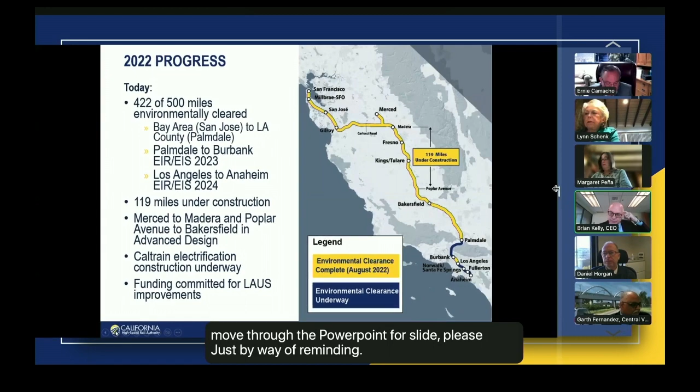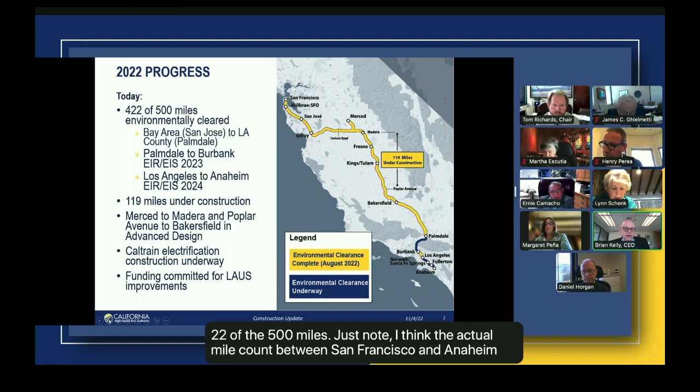Just by way of reminder, some things that we've progressed during 2022. One, the board well knows all of the environmental documents that we have brought to the board and been cleared. In the last 2.5 years, we've added about 330 miles of cleared environmental documents extending into the Bay Area and into Southern California. We expect in 2023 we'll be coming back to the board with the certification question for Palmdale to Burbank toward the end of 2023. That draft is now out for public comment. So as of today, we've cleared 422 of the 500 miles. Just note, I think the actual mile count between San Francisco and Anaheim based on our route is 494 miles, but we round to 500 for purposes of simplicity.

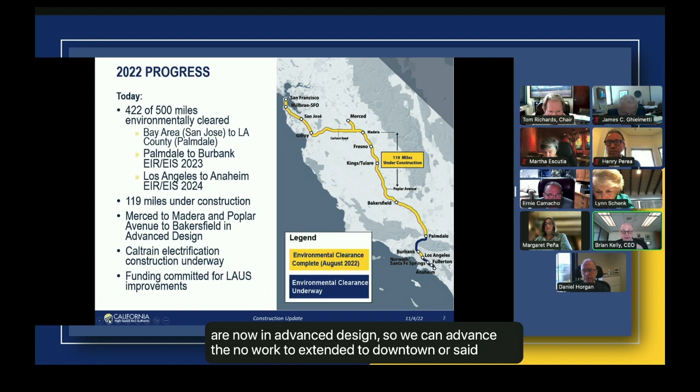We have 119 miles under construction in the Central Valley. Merced to Madera and Poplar Avenue to Bakersfield are now in advanced design, so we can advance the work to extend into downtown Merced and downtown Bakersfield, consistent with legislative direction in the Budget Act. Caltrain electrification construction is underway in the Bay Area, and by way of reminder, we are big time contributors to that project. That project has a cost estimate of about $2.3 billion.

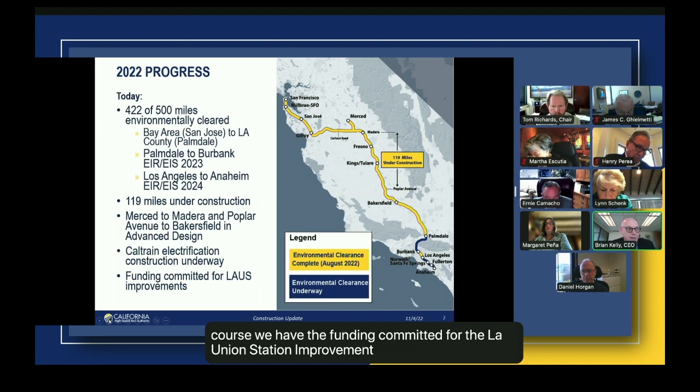$3.3 billion, and the High Speed Rail Authority is contributing about $733 million to that effort. That construction is underway. And of course, we have the funding committed for the LA Union Station improvements in Los Angeles to the tune of about $423 million.

Just talking about the Central Valley in general, this is where we're now working for the initial operating segment, with the goal to achieve initial operations by 2030. It's a 171-mile stretch, 100% environmentally cleared. Right now, 119 of those 171 are under construction. 52 miles are started in advanced design work, 34 miles roughly into downtown Merced, and about 18 miles south into downtown Bakersfield. We also have the design for the Central Valley stations underway right now.

As the board members know, the track and systems procurement we paused on during 2022, and we'll look to come back for that procurement during 2023, along with perhaps the train procurement as early as the end of 2023. We'll obviously be coming back to the board about those. And in my CEO report, I'll talk a little bit more about upcoming procurements.

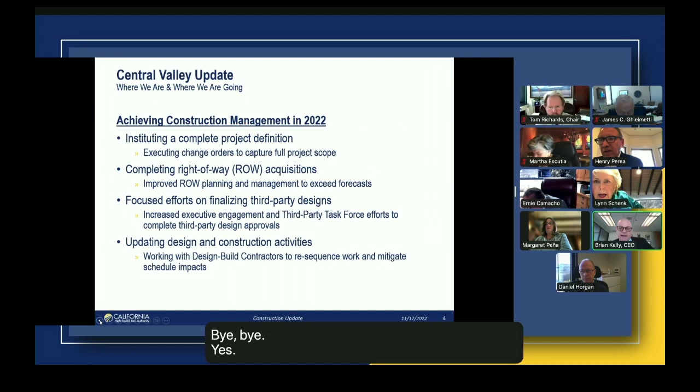Next slide. Brian, I have a question for you. Go back to that slide. Going back to the track and systems procurement in 2023 — I'm just trying to wrap my mind around, if we spent 3 years on a process that fell apart in the last month or so, what makes us think that we're going to have a procurement in 2023?

Well, I think, first of all, I think it was very educational, that procurement process. And I also think things like COVID, things like disruption in the markets tied to COVID, supply chain issues, and record inflation all led to difficult procurement strategies during 2022. I think the inflation number is starting to come down, and I think it'll come down further. I think the supply chain issues will abate as we get further into this. And I think we have to look at how we restructure that procurement. We did track and systems along with the track, the systems, and the signaling all together. And we may want to consider, based on what we learned during that process, a restructuring of how we will move forward on that. So we may regroup those issues differently as we go forward.

For example, I believe we'll get more competition and more contractors interested in just the track work, and there will be fewer that are capable of doing the signaling and systems and perhaps the rolling stock. So we'll look at how we group those things separately to get the most competition out of the process. But I think once we move forward on our strategy, we'll come back to the board with how we would lay that out, and there'll be a discussion of when to go forward. I think we do need to go forward with it, though, before the new year gets out, so we can stay on track for a 2030 operating date.

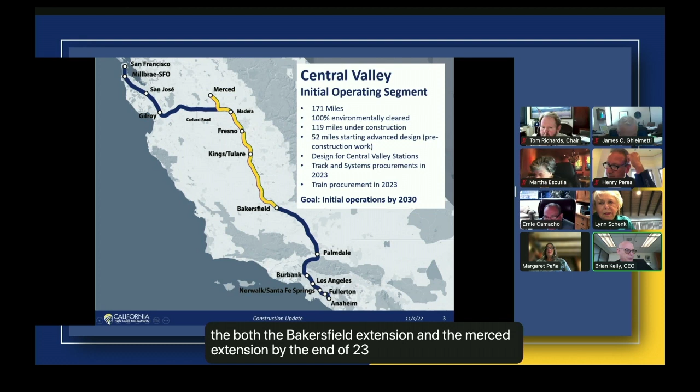We are now in design expansion for Merced and Bakersfield. It is an aggressive target, but I believe we'll be at 30% design for both the Bakersfield extension and the Merced extension by the end of '23, which means we can start a full and active right-of-way procurement process and move forward. So I think 7 years for something that's environmentally cleared now, with design advanced by the end of the year, is very doable. I like ambitious goals.

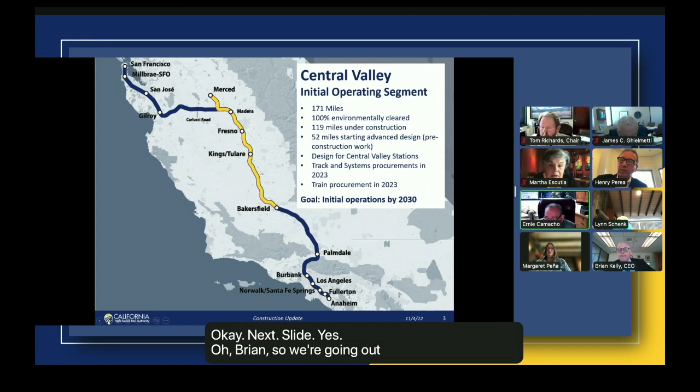Okay, next slide. We're going out talking to industry about the track and systems procurement to find out which approach will yield us the most amount of competition. I think we learned a lot in this process, Ernie.

Between a global pandemic, 40-year inflation high, and supply chain issues, the market was tough. We had requests to extend it even further, and I made a decision not to. I think it was better to pause it right now, let the market calm down. We got really good feedback from industry during that process on how we might restructure this going forward, and I think there are ways to do that to maximize competition. We want to explore that, put the strategy together, and bring it to you guys for approval.

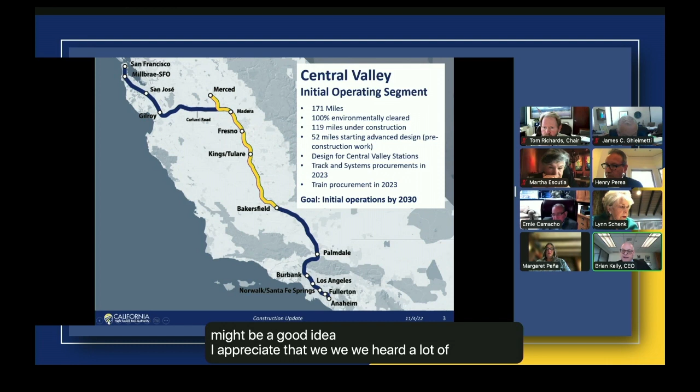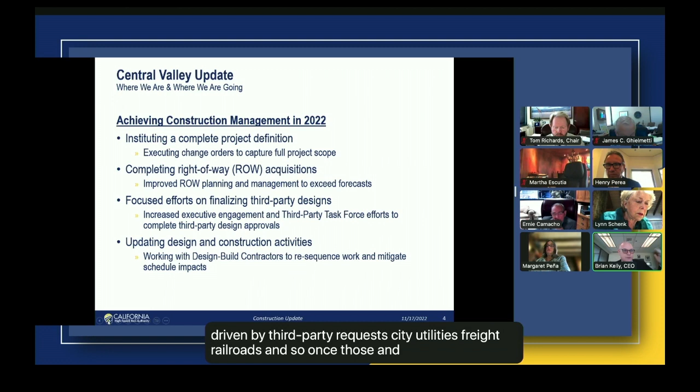We saw scope changes to the structures that are to be built, mostly driven by third-party requests—cities, utilities, freight railroads. A lot of those scope changes were agreed to in the years between 2015 and 2018, and we've been endeavoring to define all of that scope, get it into the contracts, and move the contracts forward, then get into more traditional contract management. But you've got to get scope done before you can develop pure schedule and cost. That's what we've been driving to do, and we're coming to the end of that, so I feel good about where we are.

The other thing that was important for us to do is put out very realistic and achievable right-of-way acquisition numbers, because you can't predict when you're going to get work done if you don't have the right-of-way in hand. So the first thing to do was to get very realistic and lay out a right-of-way schedule that was achievable. In a minute, I'm going to show you how we're doing on that front.

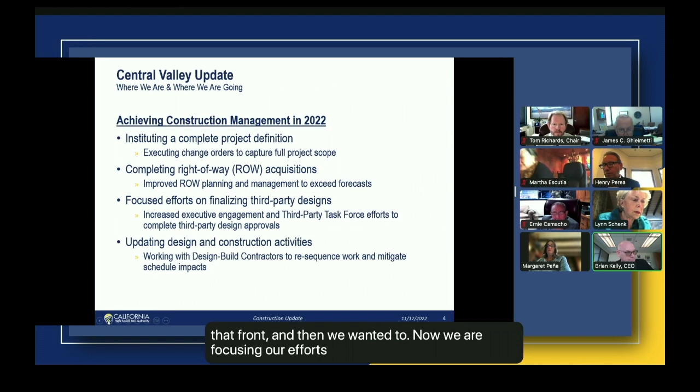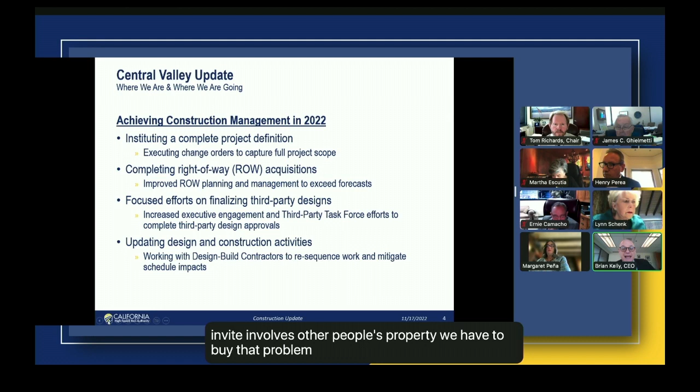And then now we are focusing our efforts on finalizing third-party design issues. What this means, so the members understand, is there are several places where we are relocating utilities—maybe an electric line, a telephone line, or a gas line. We have to move these things, and sometimes that involves other people's property. We have to buy that property and design what those relocation locations look like. So we now have a very focused process here on what we call the third-party process.

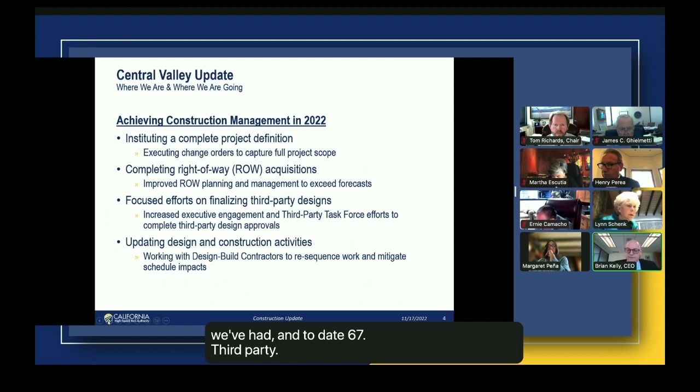We identified 67 third-party issues we've had, and to date we have solved 58 of those. So we have 9 left, and we continue to work through those to get that stuff done so we can move very efficiently going forward. And finally, working with our design-build contractors to resequence the work and make sure we're mitigating schedule impacts as best we can. These are the 4 key things we are working on as we go forward on this process. Next slide.

Let's talk about right-of-way status. I always like to report to the board on where we are. I know longtime members like Tom and Lynn know this has been a tough slog for the authority, but we really are in much better shape today.

We laid out a very realistic right-of-way schedule at the beginning of 2022. The downside of laying out the new schedule was it did set back our original estimates for construction completion, but those estimates needed a better right-of-way program in place, and now we have that.

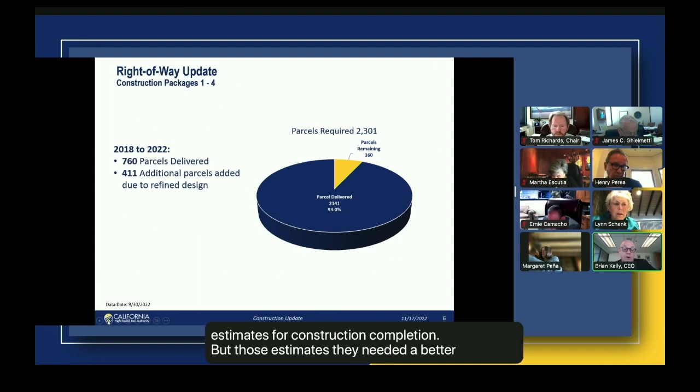This chart reflects where we are. We have about 2,301 parcels to get. We're 93% through that. We've delivered 2,141 of those parcels, and actually through October, we're up a little bit more, at about 93.6%.

When I came here at the authority in 2018, the estimate of parcels we needed was below 2,000, but that was because a lot of the scope was not in yet. Now that scope is all in. We added additional parcels, and so we stand where we stand today.

We need roughly 2,301 to get all the 119 work done. We've delivered 2,141, and actually through October, we're up to 2,157. So we're about 93.5% done with the right of way.

Next slide. Well, wait, Brian, slow down a little bit. During the pre-meeting briefing with Brian Annis, I had asked about some of the challenges in the remaining parcels. Happy to hear the answer, but I think now that we're in public session, I'll ask it again. And that is, are there any parcels that you foresee having some challenges in the community, the schools, churches, community centers, anything that would impact the community in a negative way?

Yeah, I mean, most of those kind of fights are behind us. I'm not identifying a single one that I see as a big political fight or battle in front of us. What we have in front of us mostly are issues that we have to move to complete relocation of utilities and things like that. There are some landowners who want to take us all the way through the condemnation process, and so we're recognizing that.

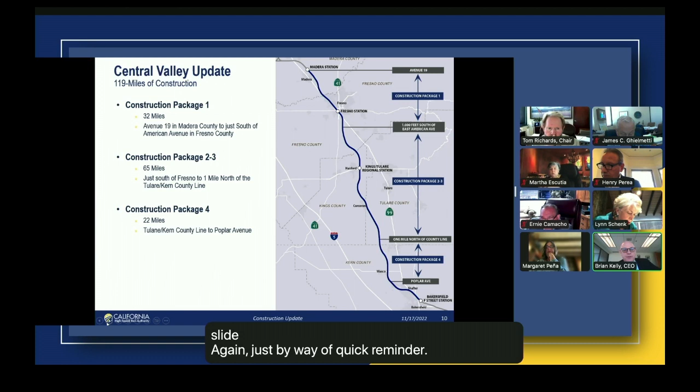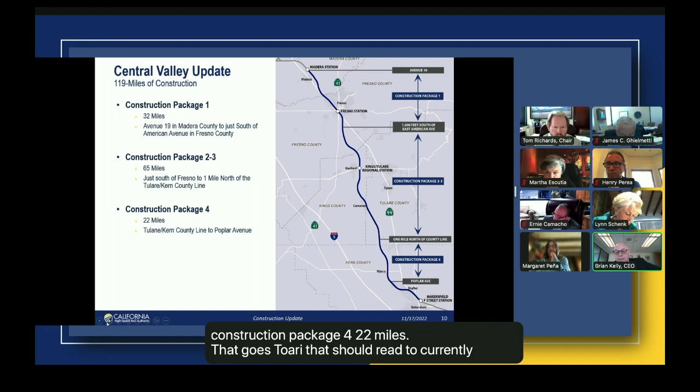Just by way of quick reminder: Construction Package 1 is 32 miles in the northern part of Fresno County and southern part of Madera County, from Avenue 19 in Madera to just south of American Avenue in Fresno County. CP 2-3 is the 65 miles in the middle, south of Fresno, to just 1 mile north of the Tulare-Kern County line. Construction Package 4 is 22 miles from the Tulare-Kern County line to Poplar Avenue in Kern County, about 18 miles north of Bakersfield.

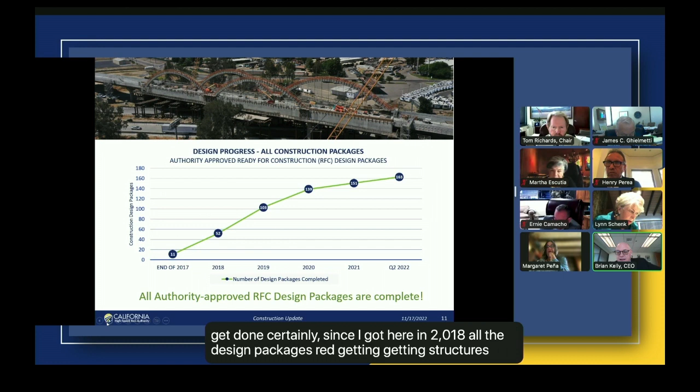This is a slide you're familiar with. One of the things we had to get done, certainly since I got here in 2018, was getting all the design packages ready, getting structures ready for construction, getting those designs completed. When I arrived, we had about 50 done of the 163 we needed. Today, all 163 are complete.

These are design packages for the structures we are building that are part of our system. We are still working through design issues on some of the utility relocations, but this chart shows the completion of the design for the structures needed as part of our system, and we've now completed that design work.

Utility relocation and design package approval: we have roughly 1,860 utility relocation designs needed. As of now, we have about 1,492 of those complete, and we have a schedule to get it to about 98% complete by June of 2023.

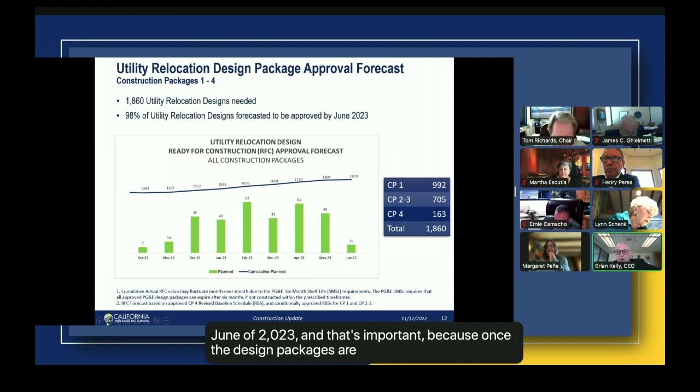That's important because once these design packages are clear, you work with the third parties, the utilities, the railroads, and others to execute crossing agreements and work plans and get everything else done so you can get to construction. So getting these design packages complete is important, and it's a key focus of what we're working on now. This is getting to the end of that pre-construction work so we can get into full construction in the valley.

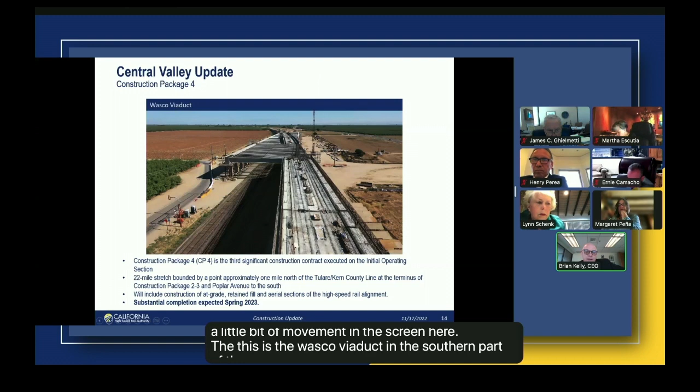I'm going to start with Construction Package 4, our southernmost construction package. This is the Wasco Viaduct in the southern part of the CP4 package. Again, it's a 22-mile stretch bound by a point approximately 1 mile north of the Tulare-Kern County line. The terminus is at Poplar Avenue to the south, about 18 miles north of downtown Bakersfield. It includes a lot of at-grade, retained fill, and aerial sections of the high-speed rail alignment.

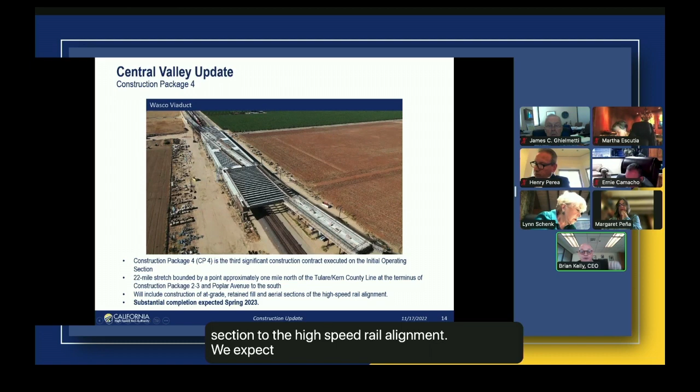We expect substantial completion of this in spring of 2023. CP4 is really coming to the end of the civil works, and this 22-mile stretch will be the first available stretch for doing the prep work and things necessary for the track element. This will be the first construction package to get to significant, substantial completion in spring of '23.

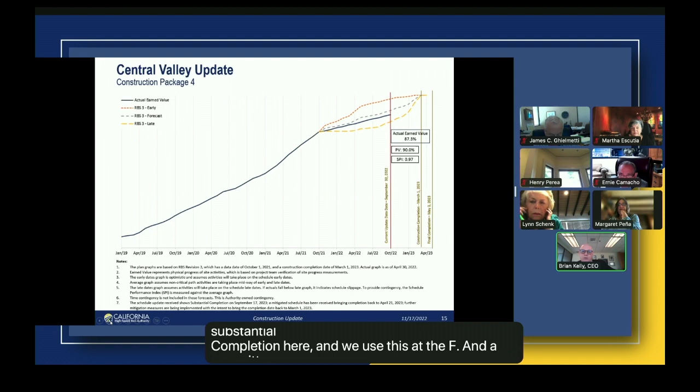We use this metric to show where we are on this. That SPI number, you want to see it at 1, meaning we're right on track to meet our estimated March 1st, 2023 date. We're slightly below that, but above the bottom line, so we're tracking for a spring 2023 substantial completion date here. We use this at the F&A committee to show where we are on this project in terms of delivery.

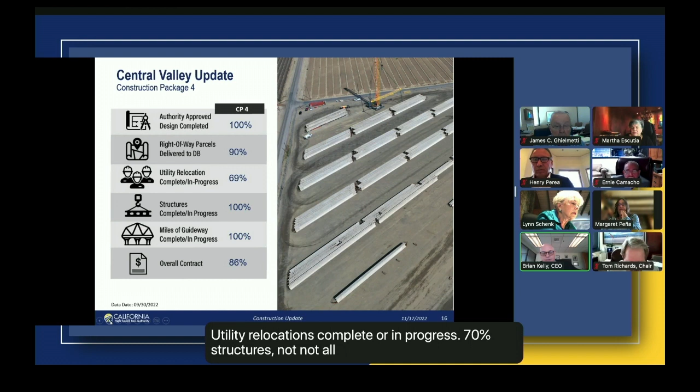The scorecard shows where we are in the various elements of pre-construction and construction work. All the design elements are completed for CP4. 90% of the right-of-way parcels have been delivered to the design builder. Utility relocations are complete or in progress at 70%. Structures are not all complete, but they're all either complete or in progress, and all the guideway is complete or in progress as well. Overall, we're through about 86% of the current contract.

This is a picture of the structures on CP4 in terms of where we are. There are 11 key structures that we have to build, and by the end of '22 we're expecting all structures will be in the complete category. As of today, 8 are underway, 3 are totally complete, and again we're expecting by the end of '22 that all structures for our system would be complete on CP4.

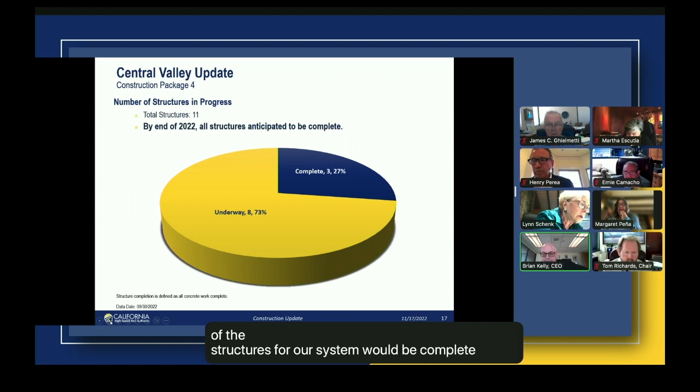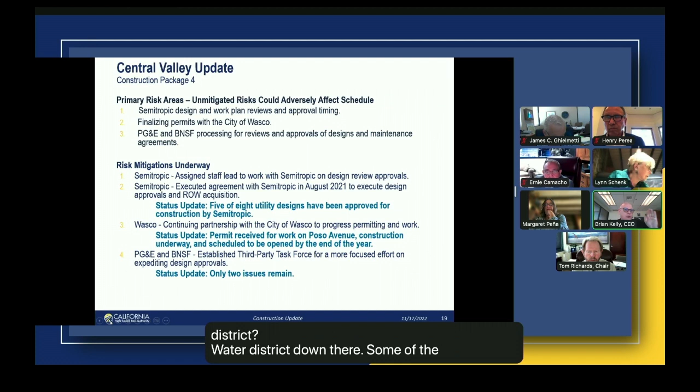Primary risk areas on CP4, and this gets to a question that Director Perea asked just a few moments ago about where the issues of risk are. We have a very delicate, fragile, and important agreement with Semitropic Water District down there. Some of the work, not so much for our guideway, but utility relocation work down there. We have a coffer dam that we need to build and some other things on their property.

So we work very carefully with them. They approve designs, they approve work plans, and they ultimately hand over the right-of-way once those things are approved. We go step by step on a process with them that was part of a larger mutual agreement we executed with them some time ago. So we are working through these issues with Semitropic, and one risk area is how quickly we work through those.

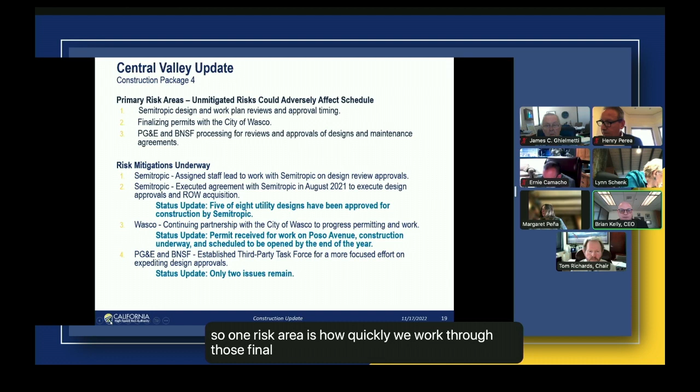Finalizing permits with the city of Wasco for some of the work going on in downtown Wasco. And then PG&E and BNSF processing for reviews and approvals for designs and maintenance agreements that are necessary to work in and around their equipment.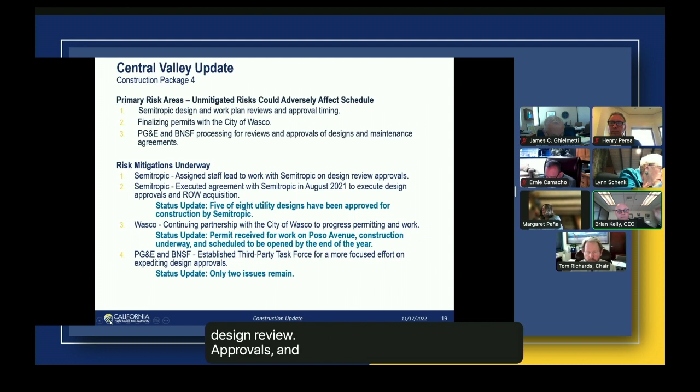So how do we mitigate these risks? That's the bottom part of this. We've assigned staff lead to work closely with Semitropic on the design review approvals. What we do is over-the-shoulder reviews now with the contractor on what the designs will look like for the utility relocations important to Semitropic, and we approve those internally first, then submit them, get their comments, and respond to those comments.

What was happening years ago is there was a lot of back and forth on comments. We're trying to now limit the number of go-backs or talks in between on the comments, so we do more over-the-shoulder review now, and we're having pretty good success. You see the status update for Semitropic - 5 of the 8 utility designs have been approved for construction by Semitropic, and we're working through these one at a time as we go forward.

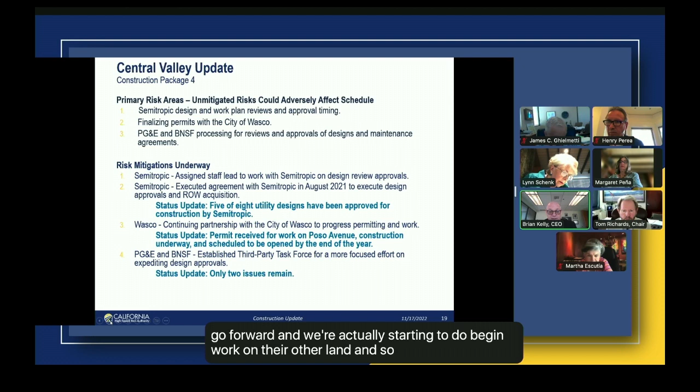And we're actually starting to begin work on their land. So it's going pretty well, but it's delicate and careful, and we've got a lot of staff attending to that working relationship.

In the city of Wasco, we have a much improved partnership with the city, and we have to work through issues. We've just received a permit for work on Poso Avenue. Construction is underway and scheduled to be open by the end of the year. We'll be doing some work on North 6th Street in Wasco as well, and we've really worked closely with the city to gain those permits when we need them and continue that work. On Poso, we've got the contractor working 24/7 to advance that work, so things are going pretty well there.

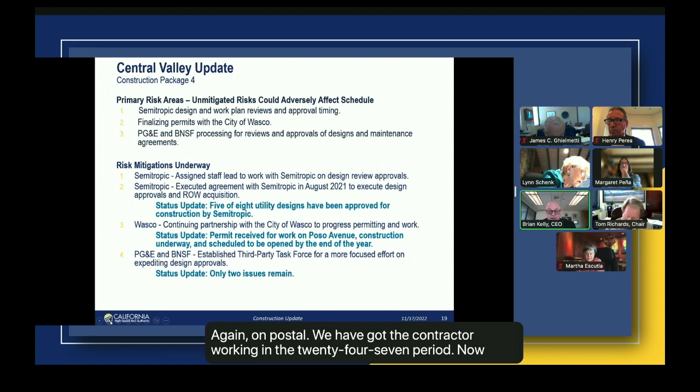PG&E and BNSF - we've established that third-party task force I mentioned earlier to focus on expediting design approvals. We're down to the last 2 issues in terms of the relationship between these two. There will be some PG&E utility relocation work on CP4 that we're examining whether to de-scope and do later, because it won't affect the guideway or structures we're building. We might be able to do some of those later through a contract directly with the PG&E contractor, so we're going to look at that. But we're again working towards reaching substantial completion of CP4 in the spring of '23.

Construction package 1 - this is the 32 miles that goes right through downtown Fresno.

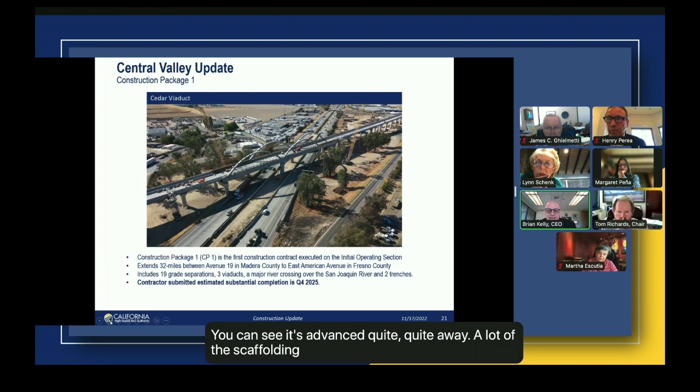That, of course, is a familiar sight for folks who live in Fresno. That's the Cedar Viaduct, which goes over Highway 99. You can see it's advanced quite a way, a lot of the scaffolding and other things are down now. That structure will be brought to you by McDonald's, so we'll paint it red and yellow... no, just kidding. We'll put a sign up that says 43 billion served... no, just kidding. But anyway, we've had good progress on this structure.

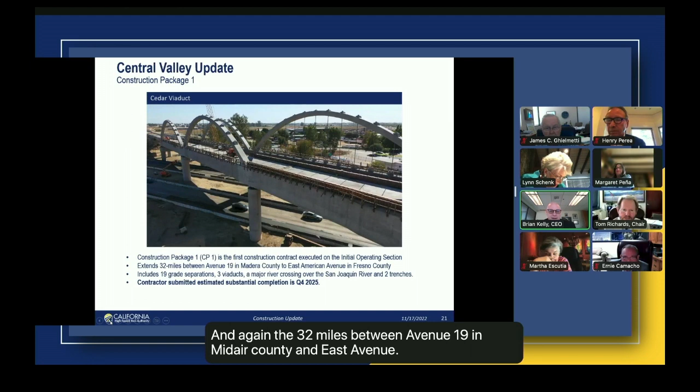The 32 miles between Avenue 19 in Madera County and East Avenue, or East American Avenue in Fresno, is this stretch. There are 19 grade separations in this area, 3 viaducts, a major river crossing, and 2 trenches as part of this system.

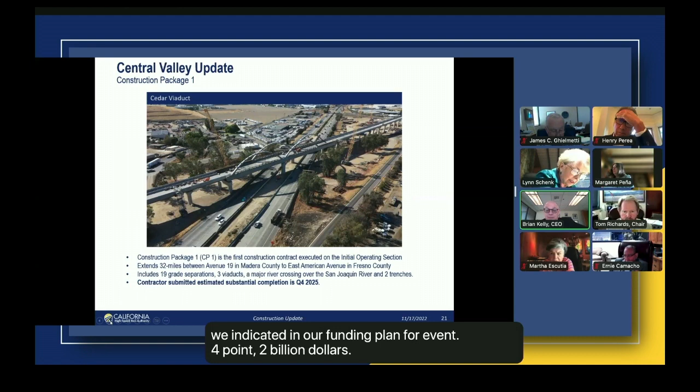The contractor has submitted a substantial completion date by the 4th quarter of 2025, which we indicated in our funding plan for the $4.2 billion sub-D plan we owe the legislature. We've conditionally accepted that schedule, and we're starting to negotiate with the contractor on risk and mitigation tied to that schedule to see where it finally lands. But we're going to be right around that date, and we'll work with them going forward on a time impact analysis and things like that.

I'm going to walk through each of the elements of CP1 now. So, next slide.

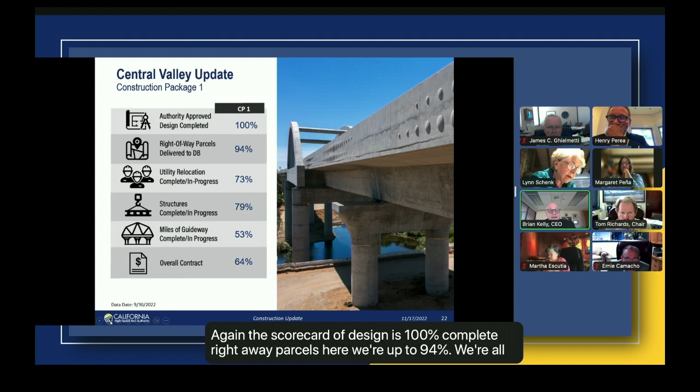Again, the design is 100% complete. Right-of-way parcels, we're up to 94%, almost done. Of 1,088 parcels needed for this, we've handed the design-build entity about 1,013. So we're really getting to the end of that. Utility relocations are in progress at 73%. Structures in progress or complete are at 79%. Miles of guideway, about half are available now, with more coming as we move these utility relocations. Contractor's work is through at about 64% today.

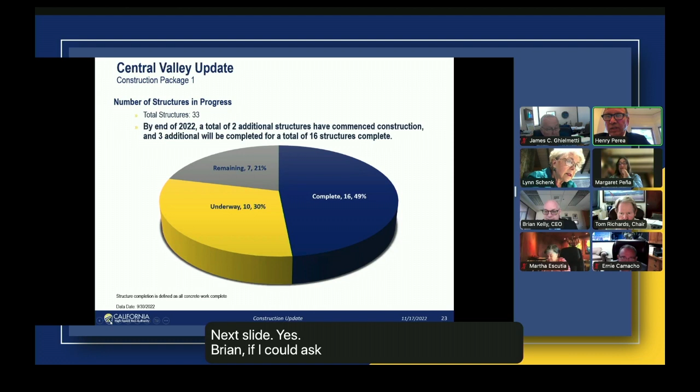Next slide. Brian, going back to that slide on utility relocations, if you were to separate those out, complete versus in progress, what would those percentages be? I'm going off the top of my head here, and I can get you formal numbers, but I think the ballpark figure in Fresno is on the order of 900 utility relocations. I know that about 350 are complete, 350 are underway, and the remainder yet to be started.

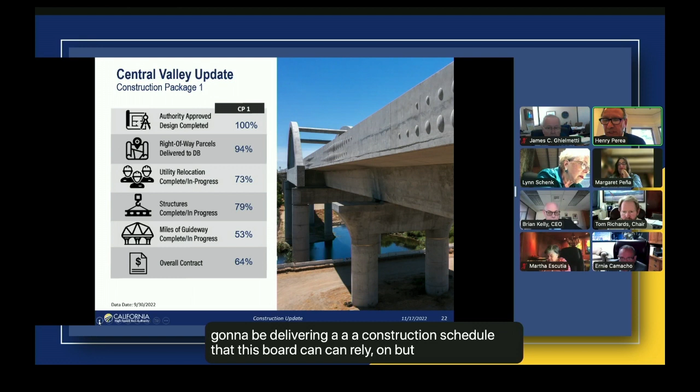Now, I know you're soon going to be delivering a construction schedule that this board can rely on, but how is that meshing with that Q4 2025 substantial completion? All of the needs for the utility relocations are incorporated in that Q4 25 schedule.

Right. So are we going to see, for example, on utility relocation, a column saying how many are complete, how many are in progress, and how many have yet to be started? Let me finish, and then also show them what the plan is to achieve each one.

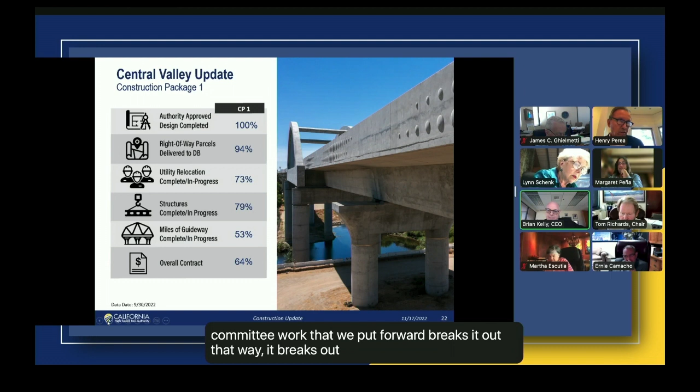Yes, we report to the Finance and Audit Committee each month the status of the utility relocations by CP. The F&A committee work we put forward breaks it out that way, showing how many are complete, how many are in progress, and how many are yet to be started. I'm happy to send it to you directly, Henry. That is incorporated in the Q4 25 schedule for CP1 right now.

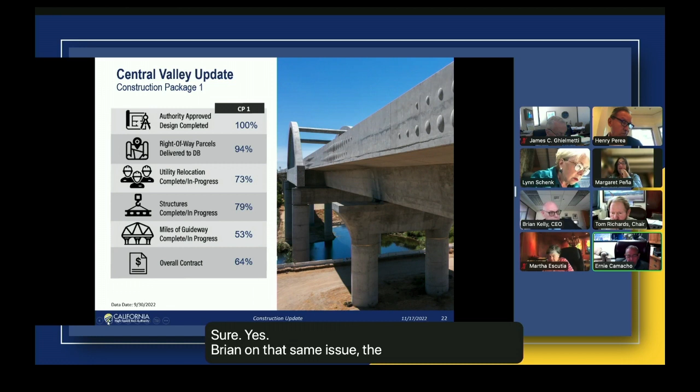All right, thank you, Brian. On that same issue, the 53% of miles of guideway. So we're only talking about guideway for CP1. Yes, that represents 53%. And the overall contract, is that for the entire... I mean, it seems like you're mixing the guideway with the overall contract value.

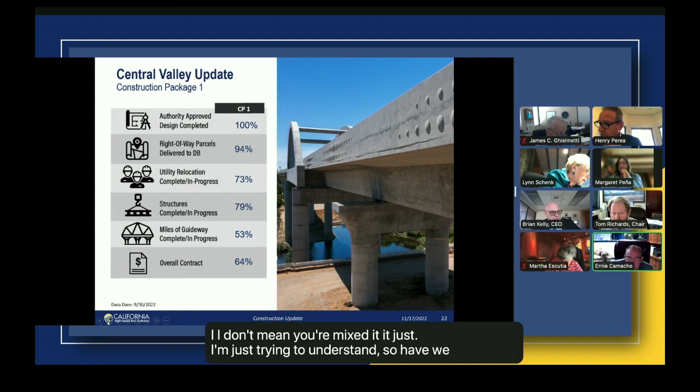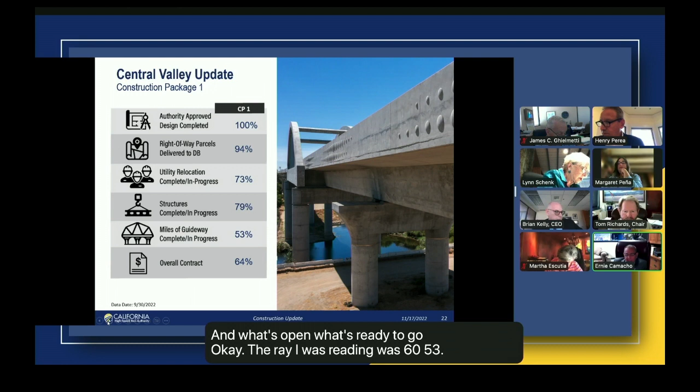Well, I'm not trying to mix it, I think I'm doing an estimate. The 53%... I don't mean you're mixing it, I'm just trying to understand. So have we expended 64% of the contract value? Yeah, as that value is expressed today, that's correct. The 53% is just a percentage of the total guideway for this section and what's open, what's ready to go. The reading was 53% of the guideway being completed, with 64% being the budget for the guideway. That's the overall contract. And then I'm going to clarify in just a second here the status of the guideway as well.

Sorry. That's all right. Next slide.

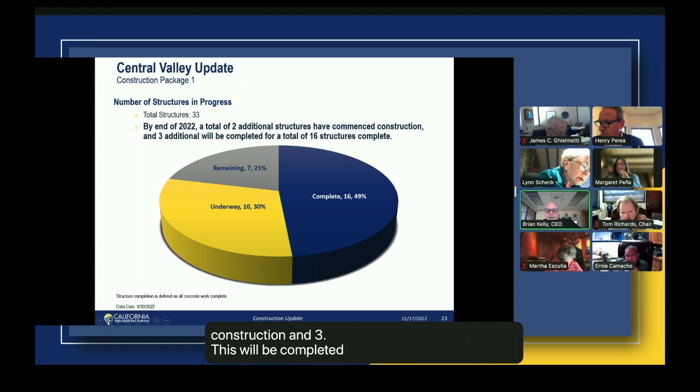So this is the structures in progress. There are 33 structures that we are constructing on CP1. 16 of those are now complete, 10 of those are underway or in progress right now, and we have 7 remaining to get started on. So of the 33, that's where we stand on the structures. And just a comment there, 2 additional structures have commenced construction and 3 additional will be completed soon, for a total of 16 complete by the end of this year. Next slide.

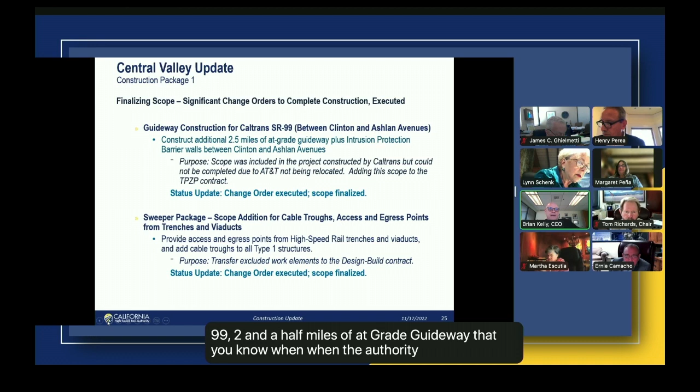Finalizing scope, there are significant change orders. The board may recall, when we met in Fresno last, I identified 12 different change orders that are part of CP1 that we are executing so we can advance work and get the scope defined and finalized. The two referenced here are Caltrans State Route 99, 2.5 miles of at-grade guideway that, when the authority relocated Highway 99, was originally going to be part of that contract. It was not, but that work still had to be done, so this was known for some time as the missing 2.5 miles. We have now executed that contract, that scope is finalized, and that work will commence soon.

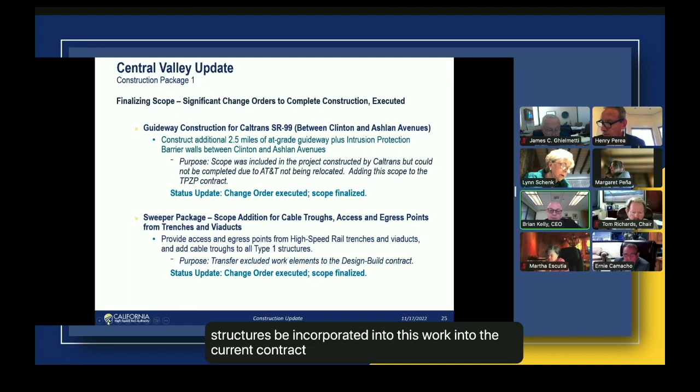The second part is what we call the sweeper package, which I talked to the board about before. These are adding stairs, maintenance access points, and escape points to the structures that were initially not in the design-build contract, but because they're mobilized on the site and have built the other structures, we incorporated this work into the current contract, and that was executed. That scope was finalized as well. So these are completed and now moving forward.

Of the 12 scope issues we identified to get the scope finalized on CP1, we have completed 10 of those. There are 2 remaining.

Other big ones that are pending: Church Avenue. This is the section of town between downtown and where the Cedar Viaduct crosses Highway 99, the Church Avenue grade separation. The City of Fresno changed the configuration of that grade separation, moving from one to two and adding additional requirements. So we are now negotiating a change order to complete that scope work, and then that's got to go through the authority governance for approval. That's work that's underway right now.

And then in the downtown area, Tulare, Ventura, and Fresno streets, the freight railroads asked for wider bridges. That was agreed to some time ago. We've now worked through getting that design complete, and now we're working through getting this change order negotiated and finalized and put through our authority governance process so we can get this locked in, scope in the schedule, and move forward. These are some of the final remaining parts of the scope for CP1.

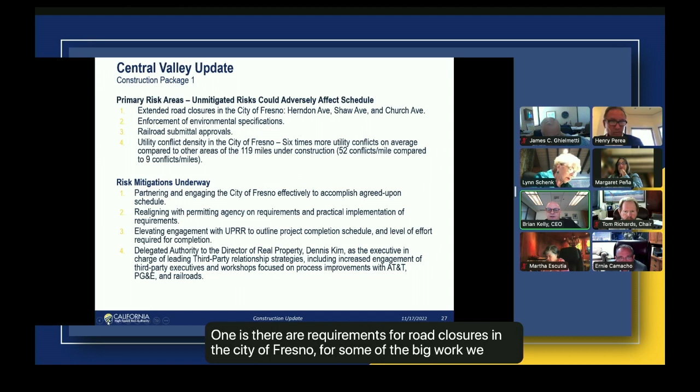Primary risk areas here, I don't think many of these will be surprising. One is there are requirements for road closures in the city of Fresno for some of the big work we have in front of us at Herndon and Shaw and Church. Garth Fernandez will lead our effort working with the city on how we'll do the traffic management plans and how and when road closures will come into place to make sure we're working through these issues. Garth, I don't know if you want to comment on that work, but that's an important part of what we have to do for some of these big construction parts that are left.

Sure, so we are continuing to work with the city of Fresno. They have been an excellent partner with us. I have executive meetings with the city to ensure we can accomplish the schedule. These four locations, Herndon, Shaw, Church, and also Olive and McKinley, are all major closures for the city of Fresno, and they have expressed concern. So we're going to be setting up a workshop with the city to walk through our schedule and all of the detours that we'll have in place to accomplish the scope of work. They've also begun to work with us on traffic control plan approvals that we need for all the utilities that are going in at the same time. So they have been an excellent partner, and we continue to work with them.

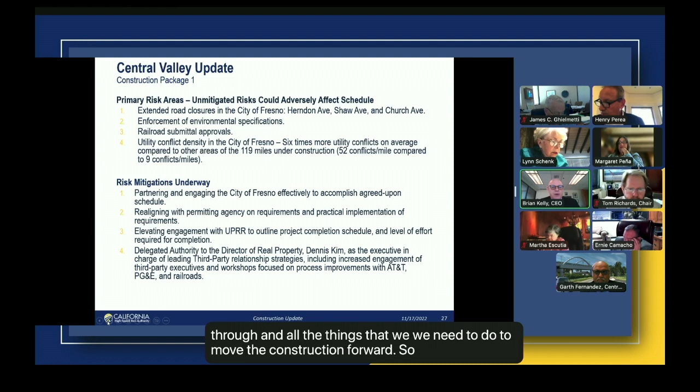The second risk area here is the enforcement of environmental specifications. What that means is there are times during the construction process where CDFW has permitting requirements that we need to make sure contractors are sticking to, and that we work closely with CDFW on how those are applied to this contract. It's a partnership we have with them, and we're executing that pretty well. We'll continue to minimize needs for any amendments or new requirements and make sure we're following through on everything needed to move construction forward.

The third one is railroad approvals. A lot of the CP1 work deals with UP's right of way and UP's equipment. We've put together a task force, including our railroad lead James Lebanowski, working with Dennis Kim, Garth, Daniel Horgan, and others, to make sure we're coordinating well with UP on everything in front of us, all the work that's left.

Just to give you a sense of the scope of work we have with UP, over the course of this project we have something like 1,300 agreements that we need UP to approve. To date we've sought and received approval for about 881 of those, so we have around 473 agreements still to get approved. These are just different small parts of the work that affect their right of way or process. We now have a team focused directly on working with UP on these issues, making sure we get through these approvals as quickly as possible. About 900 down, roughly 470 left to go.

Then the last big risk issue is the density of utility conflicts in the city of Fresno. There are 6 times more utility conflicts on average in downtown Fresno than in other parts of our right of way here, so there's a lot to do.

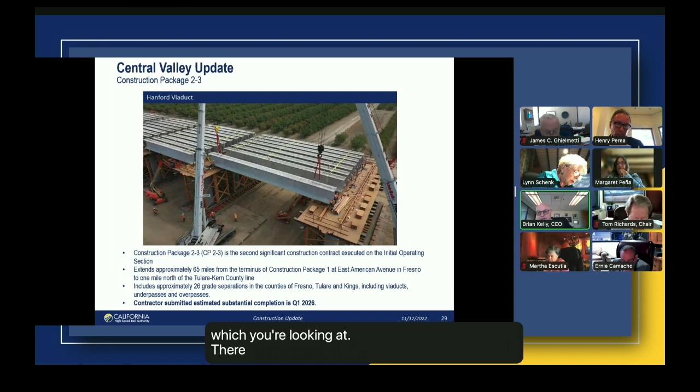CP 2-3 is the longest construction segment in the southern middle part of the 119-mile segment. What you're looking at is the Hanford Viaduct superstructure in Hanford. This is the second significant construction contract executed as part of the initial operating section, spanning 65 miles between Fresno and just one mile north of the Tulare-Kern County line, with 26 different grade separations across Fresno, Tulare, and Kings counties, including viaducts, underpasses, and overpasses.

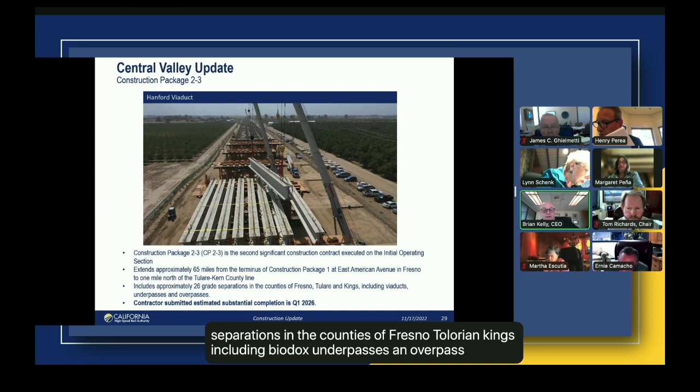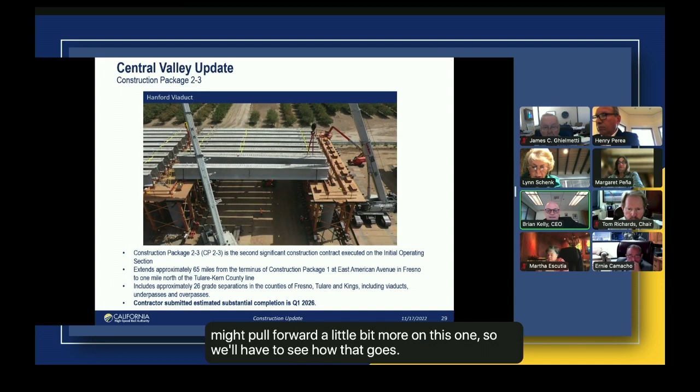The contractor submitted an estimated substantial completion of the first quarter of 2026, which we've conditionally accepted. We now get into negotiations with the contractor on additional risks and mitigations. I expect this might pull forward a bit more, so we'll have to see how that goes, but that's roughly where this one stands on schedule right now. We'll work through the negotiation process with the contractor, and I think this one has a good chance of pulling forward, but that's where we're putting it right now.

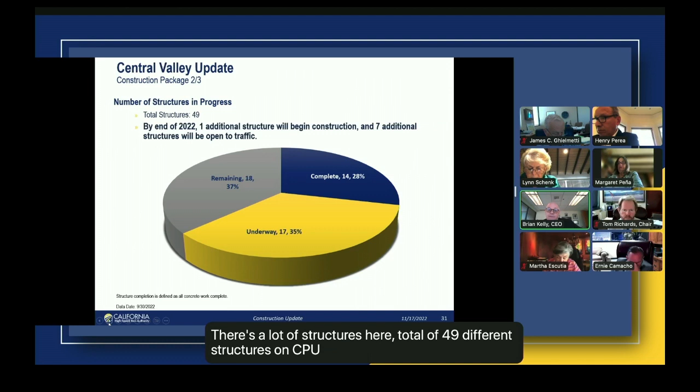There's a lot of structures here, a total of 49 different structures on CP23. 14 of those are complete, 17 are underway or in progress, and 18 are left to commence on this segment.

In terms of guideway, 65 miles total, 33 miles are complete, 15 are underway, and 17 have yet to begin in terms of clearing. About 74% of the guideway is either complete or underway.

As the board knows, we had 4 big commercial issues on CP23 that we negotiated and worked through, executing important change orders to finalize scope and get the work going. The BNSF intrusion protection barrier, 15 miles of it, has been executed, scope finalized, and construction is underway. Hanford Viaduct had a change in overall length, and we've finished that negotiation. That change order is also executed and construction is underway.

Deer Creek Viaduct is the last one we most recently negotiated; that change order is negotiated, going through our governance process, and the contractor has mobilized to start work. The last one is the Cross Creek Viaduct, which involved an alternative technical concept brought to us. We don't think we have real liability for the cost issues tied to that failed ATC, so this one is in arbitration right now.

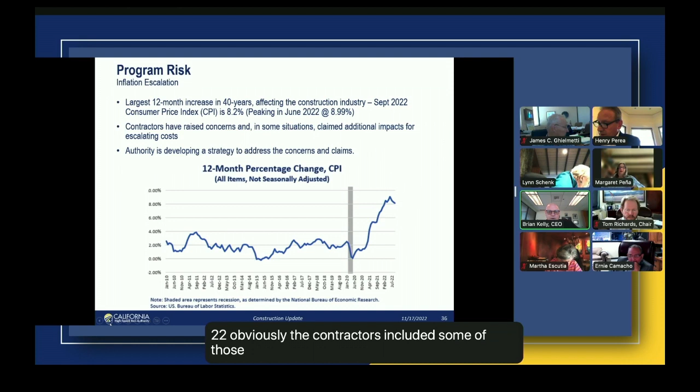Obviously contractors included some escalation points in the change orders we've executed, and they are claiming additional escalation costs. We're working through a strategy to determine which claims are reasonable, what's the right benchmark, and how to true up claims versus real costs. We're developing that strategy and addressing those concerns with the contractors.

Contract CP4 is coming to the end of its work, so maybe less of an ongoing issue there than on CP1, 2, or 3. But we'll have to see what happens with inflation. Signs show inflation in 2023 should start to dip down, and we should be less impacted going forward.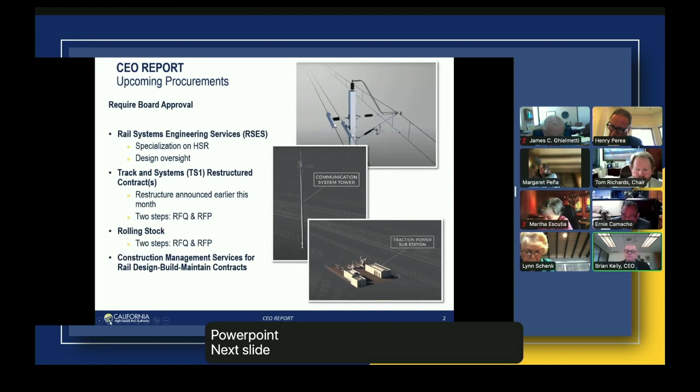Thank you, Mr. Chairman. Pull up the PowerPoint. Next slide. Members, Director Camacho did ask what the future procurements coming before this board over the next 6 months to a year are, and this is a brief list of what those will be.

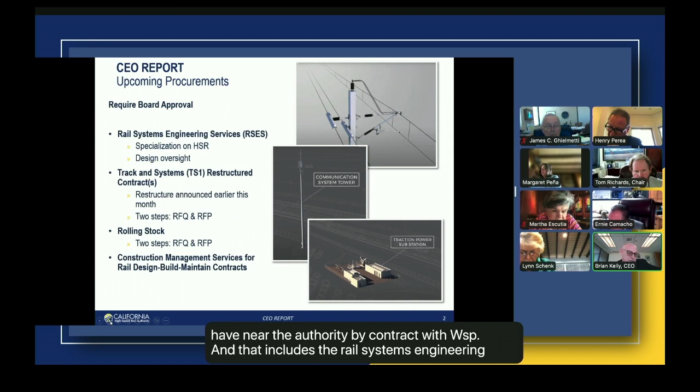The first is the Rail Systems Engineering Services contract. I'm going to jump to the bottom bullet point, the construction management services for rail design, build, maintain contracts, to talk about these two first. You may recall when we did the PDS contract, the AECOM Fluor contract, it did not include some elements we have here at the authority by contract with WSP, including Rail Systems Engineering Services and potential construction management services for rail contracts. When we say rail contracts, these are contracts like track, systems, signaling, rolling stock.

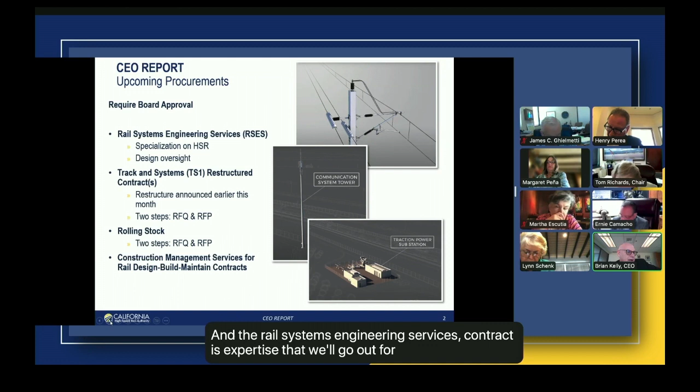So there's a construction management contract that will come forward for that. The Rail Systems Engineering Services contract is expertise we will go out for to help us make sure we are meeting all testing and commissioning requirements for high-speed rail services, and that we are integrating the contracts well from a management perspective between systems, signaling, rolling stock, and track. The rail systems engineering services contract is the first one.

That'll be an RFQ. We want to bring that one to the board relatively soon, whenever the board is ready for us to bring that. I know there's work we're doing on the conflict of interest policy, but that's the first one that would come out. Likely the second would be the construction management services one that would be in place to help us get ready for track, systems, and rolling stock.

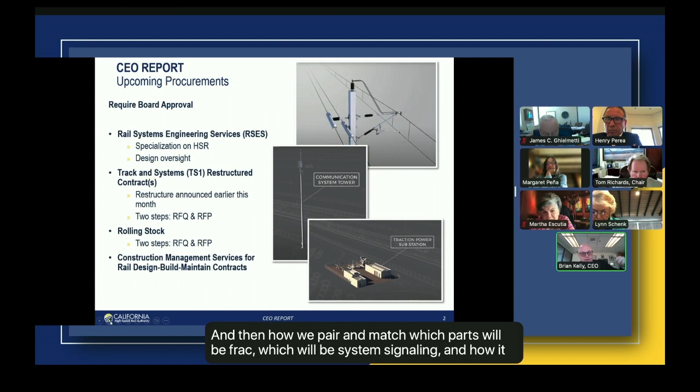Track and systems restructured contracts - we may not go out with the same structure as the last one, but restructure it a bit to maximize competition going forward. We're looking at this later in 2023, and rolling stock will likely be at the very end of 2023. Then how we pair and match which parts will be track, which will be system signaling, and how it relates to rolling stock, that's a strategic decision we still have to work through. But these are the four upcoming procurements that will come before the board during 2023: rail systems engineering services, track and systems restructured contracts, rolling stock, and the construction management services.

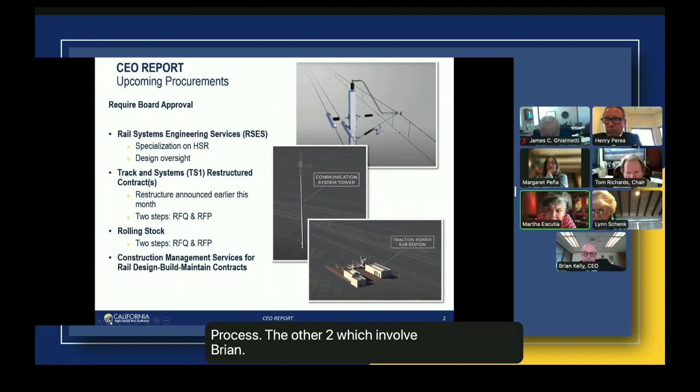Just a note on the differences: the rail systems engineering services and the construction management are straight A&E contracts for services - A&E meaning architectural engineering - and those will be done through an RFQ process.

The track and systems and the rolling stock, which involve the manufacturing of a train against a schedule or the completion of construction work against a schedule, will involve both an RFQ to qualify firms and then an RFP process as well. So those will be a two-step process. Again, these will come out over the course of the next 12 months. We have not laid out the specific schedule on these procurements yet because we're working through the strategy on track and systems now, which we just concluded the last one. So these are the four issues that will come before the board over the course of the next year in terms of RFQs.

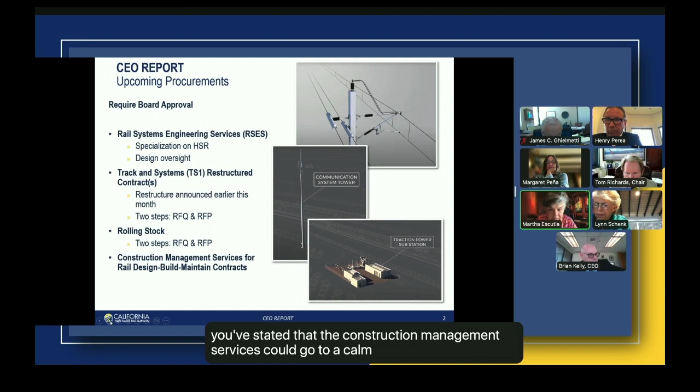I have a question on construction management services, if I may. I just wanted to clarify, Brian, that when we discuss construction management services as part of the overall contract granted last board meeting to AECOM - I think you stated that the construction management services could go to AECOM as part of your effort to perhaps do almost like a one-stop - I know you didn't use those words, a one-stop - but you seem to want to put everything together with AECOM.

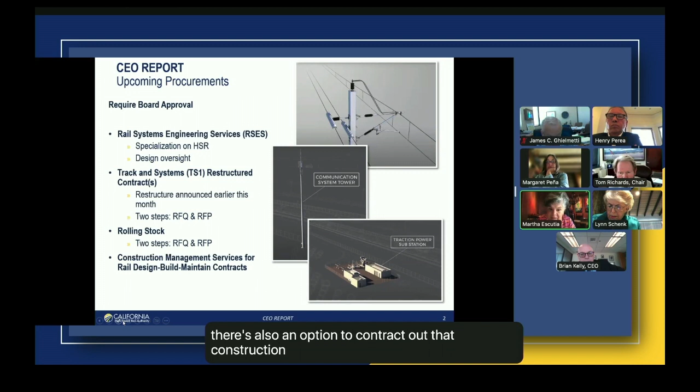But if I remember correctly, you said there's also an option to contract out that construction management services aspect of it to the broader world, in order to increase competition. Is that accurate?

Let me clarify one point. The construction management we're looking at, whether AECOM can provide, is what's now been the construction management over the 119 miles in construction in the valley. This construction management listed here is over the next rail issues - track and systems, signaling, those things. Those will not be done through AECOM and Fluor. These will be done through a separate contract - the CM for the rail related stuff.

The issue about whether we would use AECOM Fluor for current construction management issues - that's an evaluation we want to conduct to make sure, before we just keep extending the current contract managers, should we use AECOM as a more consolidated and streamlined way of advancing that. That's a decision we're looking at making. We'll talk to the board about it, but that is outside of the CM services for the rail services.

All right, thank you for the clarification. I'll stop right there because I don't want to get in too deep into stuff I don't know. But thank you for the clarification.

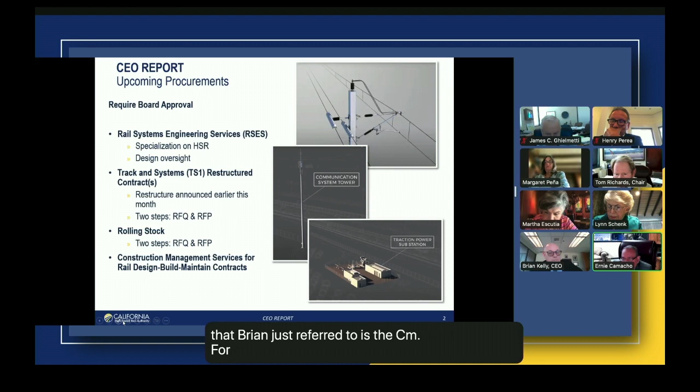Martha, the CM that you're referring to, that Brian just referred to, is the CM for CP 1, 2, 3, and 4. That's what he was talking about incorporating into the PDS contract. These are independent from that.

Okay, right, got it. But yes, it could be incorporated into the AECOM PDS contract, but if this board decided to perhaps contract it out to the outside world, that can be done too, correct?

Yeah, it can be, but I'd just say, remember that for example CP4 is going to come to conclusion in the very beginning of 2023, so we're not going to contract out that work - that's coming to an end. In terms of 1, 2, 3, that will have a little bit more time left. I think the issue is whether or not we want to streamline the number of different contractors we have to manage existing work, and that's an option that we have.

I'm happy to talk to the board about it before any final decision is made, and I think I've committed to do that. But that is just on the 2, 3, and 4 work, and 1 and 2, 3 work that is left.

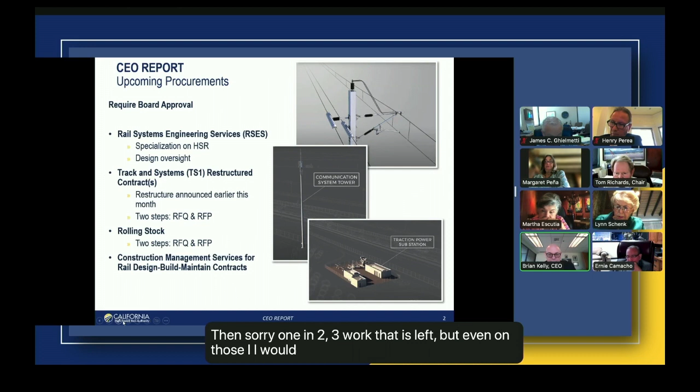But even on those, I would probably not recommend doing a new procurement in the middle of that work coming to the end. In other words, I would either keep the PCMs we have in place now on that work, or consider asking the PDS to take that work over, but not start a whole new procurement process that might take 6 or 8 months when the work is going to conclude shortly thereafter.

So that's why there's a separation in looking at it there, but on this CM work for the rail stuff, that's different - that's not going to involve AECOM Fluor. All right, thank you for the clarification.

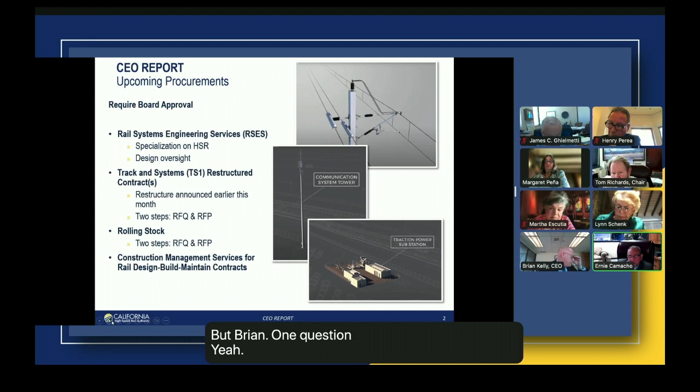Brian, one question - when does the CPM or the CM contracts expire under CP 1 and 2, 3?

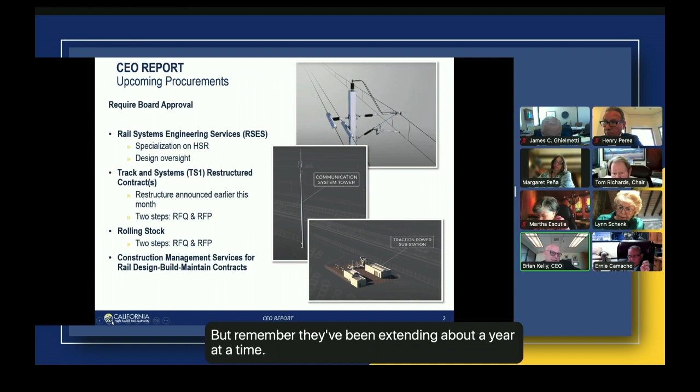In terms of funding, 4 will extend into the conclusion of that work because 4 is going to conclude in the first quarter of 23. The other ones have an interim date of concluding by December of this year, but remember they've been extending about a year at a time right now. I will likely extend them a little further as we evaluate the ability of others to do it, and that's where those stand right now.

So we aren't without CM services - we will not be without CM services. And then management will be back before the board with its recommendation on how we move forward later. Yeah, that's correct.

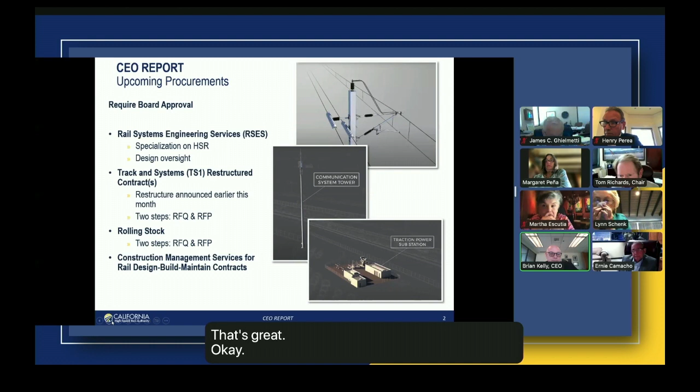Okay, thank you. Go ahead, Brian, if you've got anything else. No, nothing more on this - just the last slide I have is a quick program update, and then I'm done.

The program update here is just last night in Los Angeles, the authority received another award from the Women in Transportation Seminar, this time the Los Angeles chapter, for recognizing our work as Employer of the Year, mostly because of the diversity in our workforce, particularly with women executives who are helping us advance this program.

When you look at our executive team, we've got great professionals on this. And look, when I came into transportation 28 years ago, it was a male-dominated field. That's no longer the case here. It's certainly not the case at the authority. And it's just nice to receive the recognition for the diversity that we bring to the table here.

Well, congratulations, Brian, and congratulations to staff. Next time, for future reference, if there's such an opportunity, if you can let some of us know who live in Los Angeles, I would have loved to have attended that award ceremony and give support to our staff. Happy to do that as well. Yeah, okay, we'll do that. Thank you, Brian. Congratulations. Thank you. That's all I have, Mr. Chairman. Thanks. Okay, thank you.